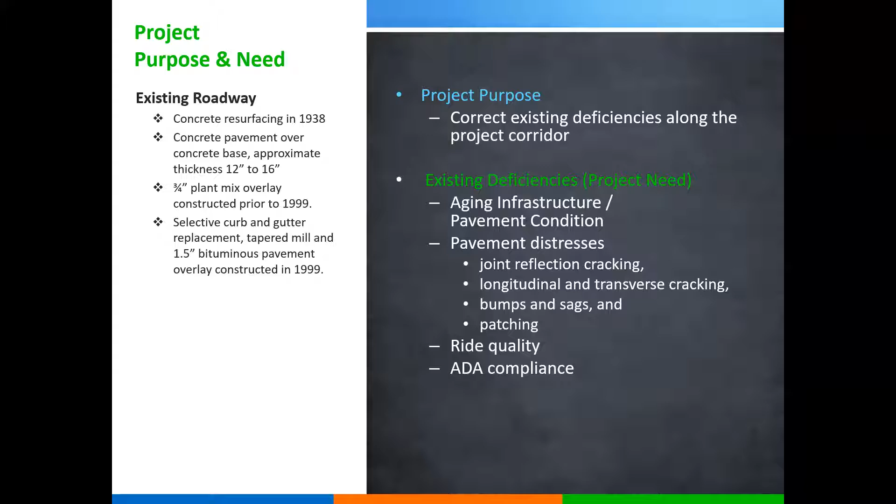But there was also some selective curb and gutter replacement, and a mill and overlay constructed in 1999. So overall, the original roadway is over 80 years old, and it's kind of time for it to be replaced. But there's also some opportunities here to provide some improved ADA compliance out there. And so we will have some improvements in the project to address that as well.

The project will be facilitated by the City of Grand Forks, but it'll be administered through the North Dakota Department of Transportation local government. It'll be funded under the Urban Grant Program, and that's federal funding. And it has a cap, though, on the federal funding of 1.6 million.

So how the project will be paid for: of the construction costs, about 80.93% of those costs will be federally funded, with the remaining 19.07 being city funded. However, once that $1.6 million cap is reached, anything over that cap will be 100% city funds. And it is currently scheduled for construction next year during the 2022 construction season.

You said it was 1.6 is where that 80.93 cuts off? Yes, so that split will apply up to that cap. Okay. And then anything over 1.6 will be 100% city. And that funding is only on eligible items. There are some items that NDDOT or these federal fundings do not cover. So there is some limitation on that, but more or less everything will fall underneath an eligible item. So. That's correct.

So as part of this project, there will be a number of different things under consideration. The obvious improvement is the reconstruction of the roadway itself. ADA improvements, again, some of those are obvious because people will see new curb ramps, new detectable warning panels out there, but some of the things that people may not realize are ADA improvements are things like making sure that the sidewalk slopes out there are conducive to ADA accessibility. So those will be included no matter what alternative is selected, as well as removal of the existing street lighting and new street lighting installation.

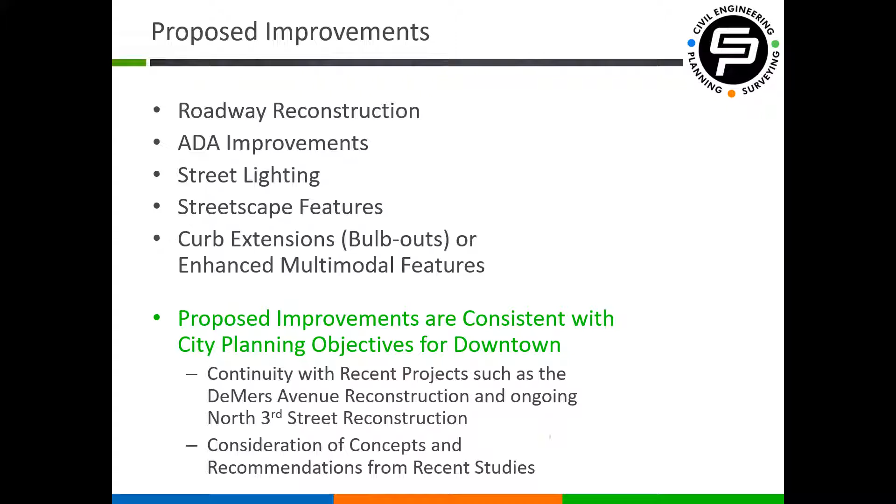And these improvements are consistent with the city's planning objectives for downtown. They'll provide continuity with the recent projects downtown, like DeMers Avenue and the ongoing construction on North 3rd Street. But they'll also take into consideration some concepts and recommendations from recent studies that have been done on the downtown area, and we'll get further into those as well.

So we talked a little bit about streetscape features. What are those? What does streetscaping mean? That'll mean things like decorative sidewalks, some pavers out there, some seat planters, new trees, potential bases for decorative lighting downtown here, and things like bike racks, benches, trash cans that aren't just your standard can. And again, those will be similar to features recently installed on DeMers and on North 3rd.

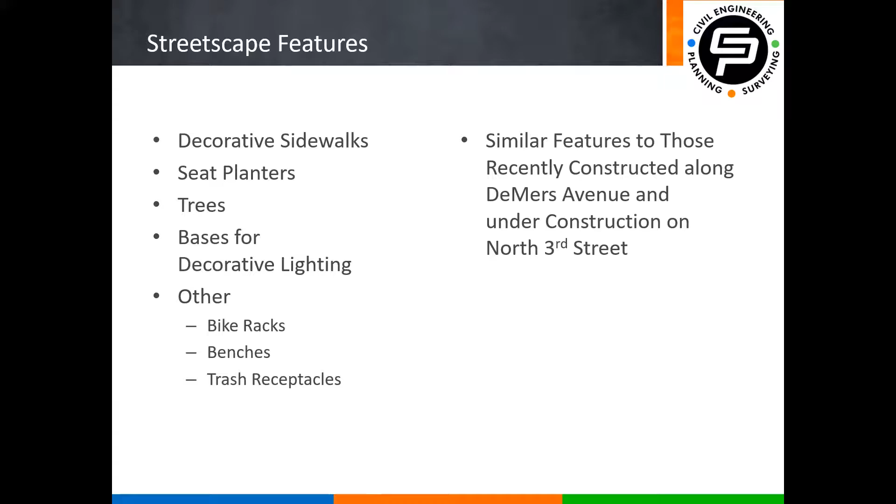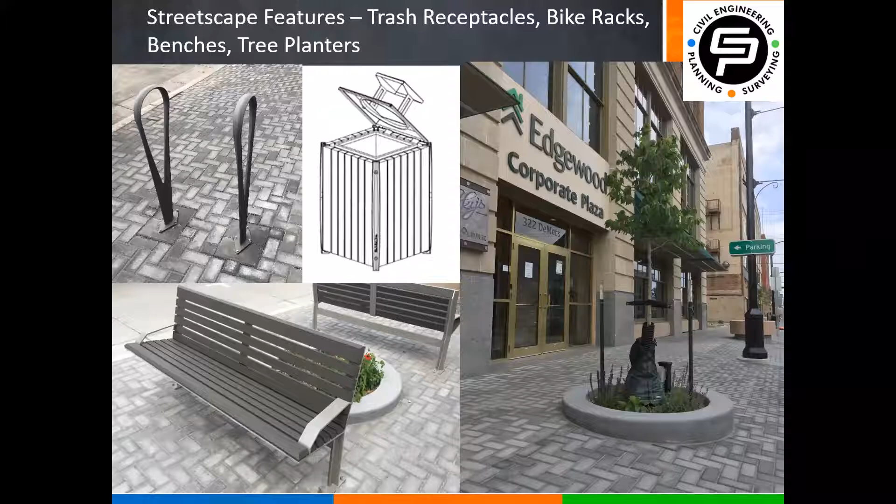So what these might look like if you haven't seen them already, this is an example of a seat planter that will eventually have some flowers in it. So you can see those decorative sidewalk features, a nice finished look to it. The benches in the lower left corner with some plantings, decorative bike racks, the new trees and the floral accents to those. So it really will make for a nice looking continuity with the recent improvements to the downtown area. The trash can that you see will be a little different from what was recently installed on DeMers Avenue, but will have a color scheme that will go along with the surrounding area.

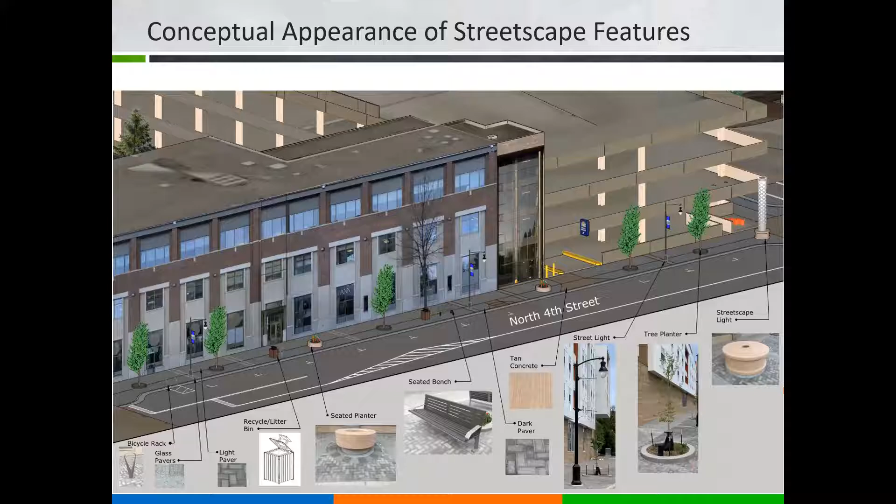So what might those look like and where might they be? Again, there's just some pictorial representation of the decorative features, and they would be located between the curb line and the buildings. And so again, very similar to the recent construction on DeMers Avenue, but this is just a concept of where and how they might be laid out and what they might look like along that corridor.

So with any construction projects, you're going to have some temporary impacts that occur, as we well know, downtown here. And what we anticipate those will include for this project will be temporary impacts to vehicles. We're going to have some detours out there. Pedestrians, same thing. We may have to walk around the construction for a little ways. And also bicycle routes. Right now, there aren't separated bicycle facilities in that area, so the bicycles would be detoured with the vehicular traffic as well.

There will be replacement of the existing trees. One thing that I think is going to be important to clarify is any tree replacement would be in the city right-of-way. So we don't anticipate removal of any private vegetation or trees.

We want to also make sure we do know that we have some historically registered properties along that corridor. So we want to protect those resources, and there's actually a study underway to tell us what and where those are to anticipate. And the project requirements for construction will also include what's called a discovery plan that will tell the contractor what to do if they find something as they're digging out there. So there will be requirements to protect those resources.

We also anticipate that any accesses to businesses along the corridor would remain open throughout the entire duration of the project. There won't ever be a time where you literally cannot get to your front door. So we do anticipate incorporating that requirement into the project.

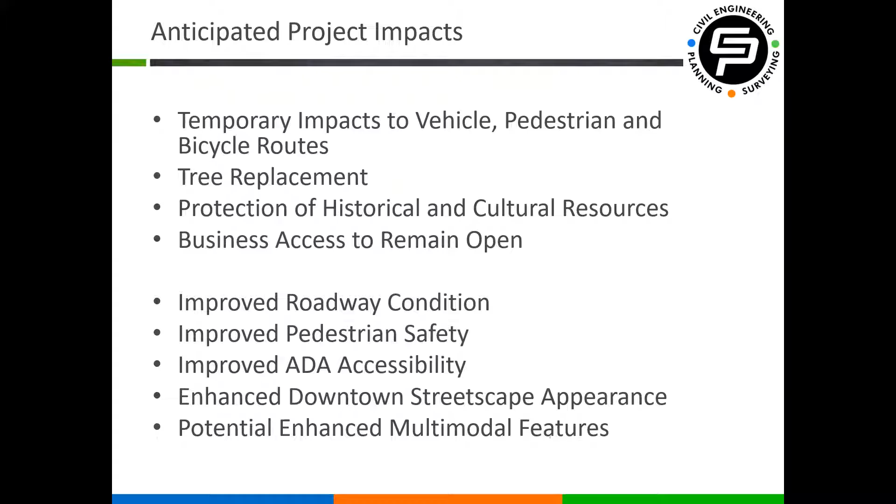So Jen, to your question as well, property and pedestrian access during construction. So at any given time, a sidewalk will have to be reconstructed along here. So what we've done, and this may change during the development of the project, but we have identified a way to phase the pedestrian access. And so you would always have access to your front door, except when they do the work directly on the sidewalk in front of it.

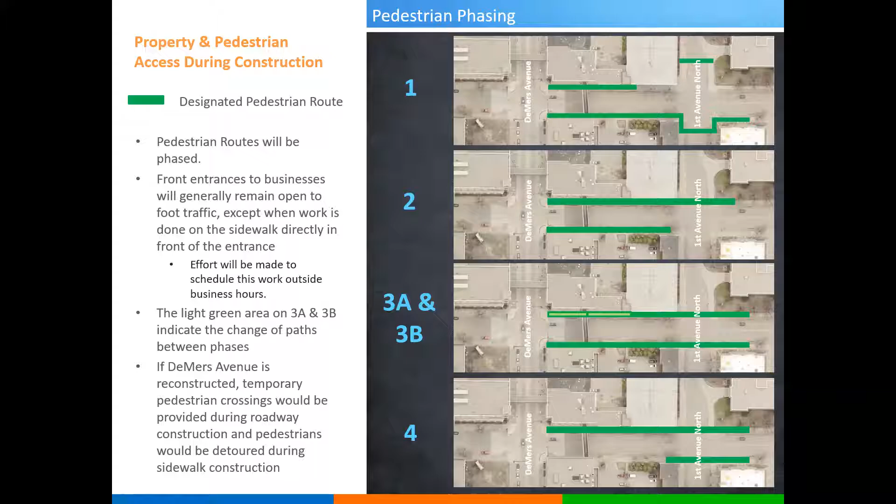Okay, we will talk in a little bit here about a potential construction option that would include some construction in the DeMers Avenue intersection. And basically we would provide temporary pedestrian crossings around that. So you wouldn't have to go much farther than the edge of the intersection to cross there for pedestrians. Vehicular traffic would be detoured a block over, but pedestrians would be able to go around the intersection construction if that alternative was chosen.

So what alternatives are we looking at? We have two that are currently remaining under consideration. We started with quite more than that, and they included various configurations of driving and parking lane widths, having bike lanes or sharrows, which are the shared vehicular and bicycle lanes similar to what you see on University Avenue in town here. We looked at some bus lane and bus stop options, as well as different widths of the sidewalk and boulevards. And when we talk about the boulevard, we would be referring to the area between the curb line and the sidewalk. So basically what I'll call the non-walking area of the sidewalk.

And we have one layout that we are considering the base layout. The reason that we're considering that the base layout is that it was the configuration that was used to secure the urban grant program funding, and it was the configuration used in that application. So because that configuration exists in all the previous documents, we are considering that to be the basis layout. It also is most similar to what exists today. We'd have parallel parking on both sides of the road, and it would also be pretty similar in look to improvements on DeMers and 3rd.

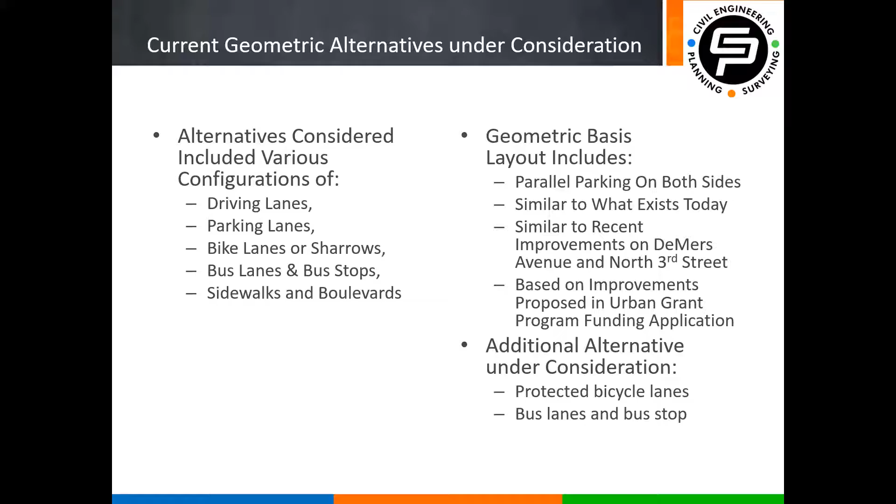And we also have an additional alternative that looks quite different, that would not have the curb bump outs that you've recently seen, but would have bus lanes and protected bicycle lanes. So what would those look like? The preliminary geometric layout of the basis alternative basically would connect to the new bump outs at DeMers Avenue. It would have similar bump outs constructed at First Avenue North.

Oh. And it would have 16-foot wide driving lanes in general, so wide enough for vehicular and bicycle traffic. And there would be a left turn lane from 4th to Demers. First Avenue North would be straight through on both sides, and the side streets, with the exception of the addition of the bump outs, would retain their current configurations.

We would maintain parallel parking on both sides of the road, and there would be an 8-foot sidewalk, and that's a little wider sidewalk than either DeMers Avenue or 3rd Street have in the new construction. The reason that we would like to see that a little wider is because of the existence of Central on the next block, so we'd like to see a little bit wider pedestrian path in there to accommodate the additional pedestrian traffic. And then there would be another 6.5 feet between the sidewalk and the road. And you can see here would be those streetscape features, the street lighting, benches, trash cans, things like that.

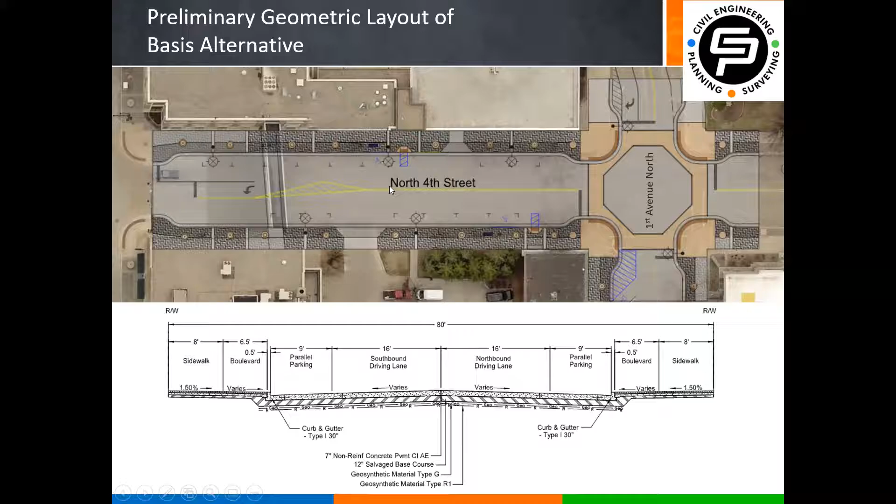And so if a person was standing on the street, this is what we anticipate that they would see. So with Central High School being in the lower right corner off the screen, this would be looking toward DeMers Avenue down 4th. I didn't realize that it was this intersection. I thought it was just down to that corner. That's like so much more exciting. It is very exciting. And you see some of those streetscape features off to the side. So we do think that this would produce a nice looking functional corridor for the downtown area.

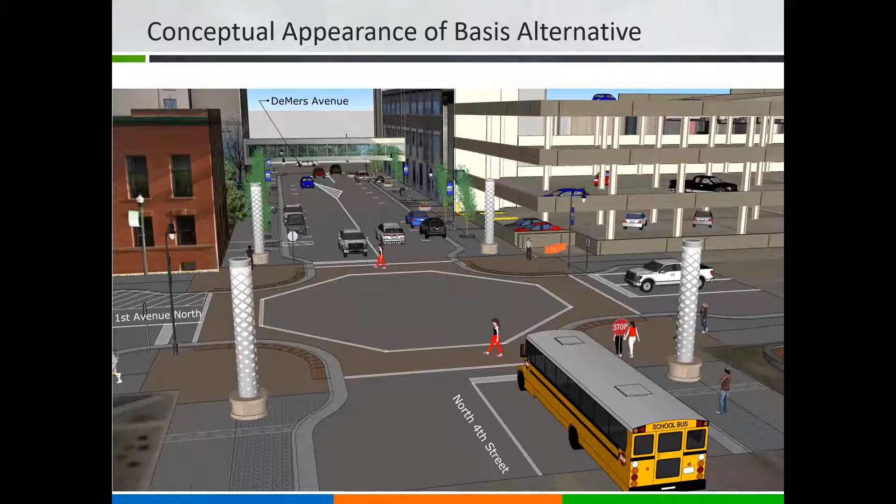On First Avenue, no decorative sidewalk feature down towards west? Correct. The intersection improvements would end basically where we would need to go to tie in elevation-wise for any changes that were made in the intersection itself to accommodate the bump outs. But the sidewalk would still go back, it just wouldn't be there? I mean, the street would still go. Yes. We would still connect everything up, but the decorative features would stop at the end. Cool. Thanks for letting me ask tons of questions. Absolutely, that's what we're here for.

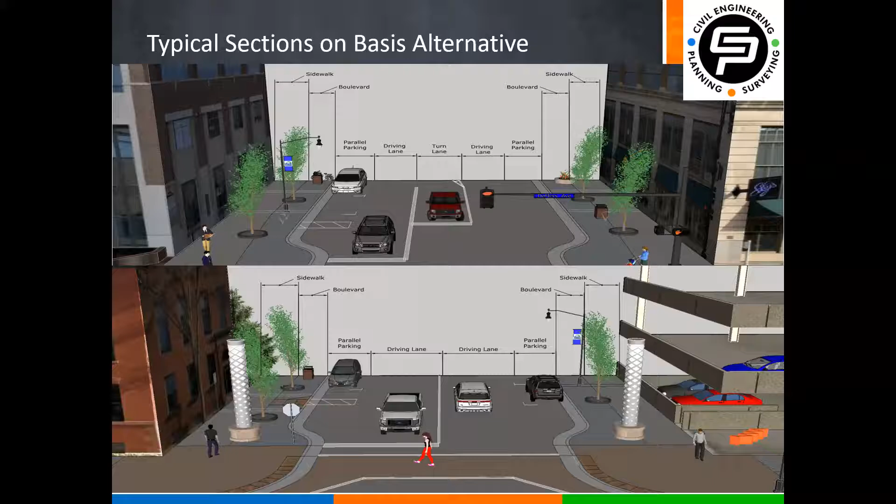So the other thing too is, up next to DeMers Avenue with the left turn lane, how would that all fit in there? And you can kind of see how the streetscape features, like we talked about, would be located in between the curbs and the buildings, but there's still enough room on the back sides of those to walk. So when we get into comparing the alternatives later, when we talk about the passable width of the sidewalk, keep in mind this is a good example to show that the sidewalk may be wide, but there's a couple of spots where those decorative features encroach into that area. So when we talk about passable width, we'll be talking about the area that is available to walk.

So the figure that you see here is excerpted from a study that was prepared by KLJ for the Grand Forks, East Grand Forks MPO, and this came out last fall. This alternative basically is an opportunity to incorporate enhanced multimodal features in the downtown area. As you can see here, this would be an image from DeMers Avenue, looking north along North 4th, and would incorporate separated bike lanes. By separated, we mean having a median in between vehicular traffic and the traveled bike lane. And as you can see here as well, it would carry those features out into the DeMers Avenue intersection as well.

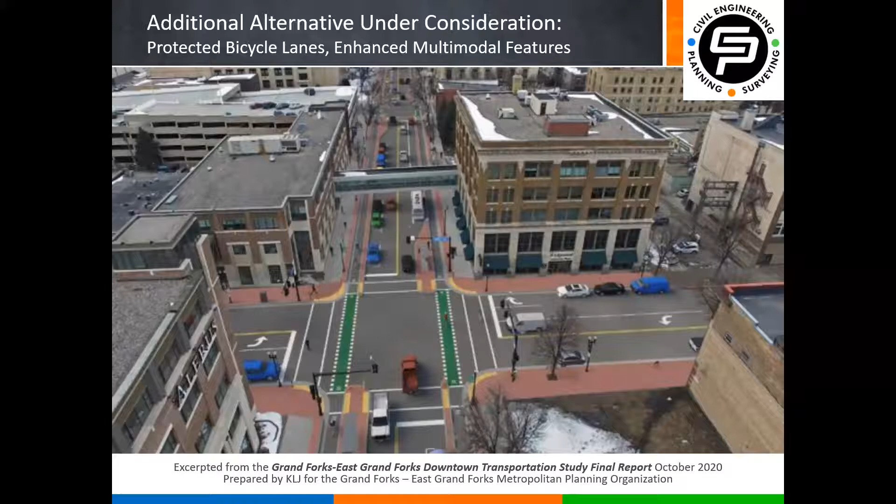So the ends of the project, the termini, would become longer than the other alternative because, for example, at DeMers Avenue, we can't take that bike lane to DeMers Avenue and just have it dead end. We would have to have a place for it to go. And you would see here as well that there are no bump outs on the through direction of North 4th. So the pedestrian crossings would be significantly different than the basis alternative. And that is the reason why this alternative would have to include the reconstruction of the DeMers Avenue intersection.

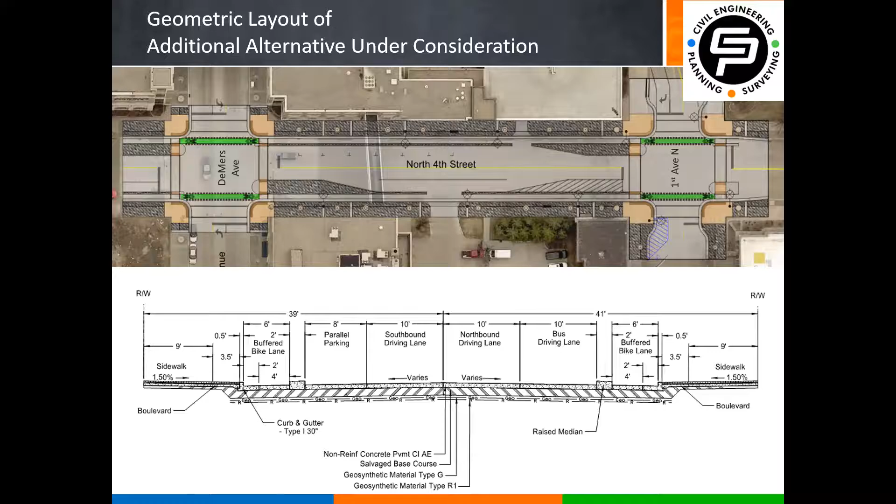So in comparing these, when we did our parking stall count, we went from DeMers Avenue to the driveway between First and Second Avenues North. And the reason for that is the bump outs actually extend into the block between First and Second. So keep in mind, if somebody goes out and counts parking spots between Demers and First, that's not how many there are. That's the length that we considered in this analysis here. So today there are 21 parking stalls out there. And if the option with the bulb outs were constructed, there would be 17. Basically the big reason for those parking stalls disappearing is that the bump outs take more curb area to do.

If the protected bicycle lanes and the enhanced multimodal features were constructed, there would be 7 stalls remaining along that stretch. The total width behind the curb, so the distance between the curb and the building, with the bulb outs would be 14.5 feet. With the other features, we'd have to go a little wider. We'd lose about 2 feet there. And that passable width, again, where you can walk because of the location of the streetscape features, on the bulb out option would be 7 feet. And on the enhanced multimodal and bike lane option would be 5 feet wide.

And driving lanes on the bulb out option would be 16 feet wide. And it's notable too that that 16 feet is wide enough to accommodate the bicycle traffic, just not separated. And under the bicycle lanes being separated, the driving lane for the vehicles would remain at 10 feet. And so again, just to point out, when we talk about that passable width, we're talking about the area of the sidewalk that you can actually get to with your feet.

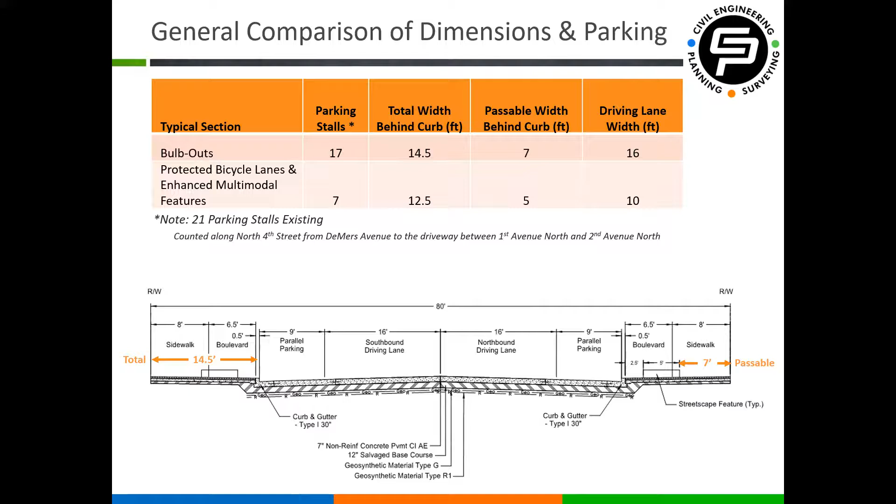And so in comparing these two options, again, the base alternative being the one that was in the urban grant program application, if we were to construct the bicycle lanes and enhanced multimodal features alternative, we would gain those protected bicycle lanes. We would gain a separate bus lane for that type of travel. And there would also be that potential new bus stop and shelter at DeMers Avenue there.

So the cons associated with that would be the fewer parking spaces. We estimate that that option would cost about $1 million more than the base alternative to build. And that sounds like a really high number, but the primary reasons for that are the additional length, the reconstruction of the DeMers Avenue intersection, and also the additional cost to relocate the utilities. So when we move those curbs out, the utilities would have to be moved accordingly. And also the construction of the raised medians between the traffic area and the bicycle lanes.

We would not have the bulb outs for pedestrian safety. The bus stop location being up by DeMers Avenue could potentially impede traffic movements there. So if you're, for example, coming from the bridge and you want to turn right onto 4th Street, if the bus is parked at that bus stop, you wouldn't be able to turn there.

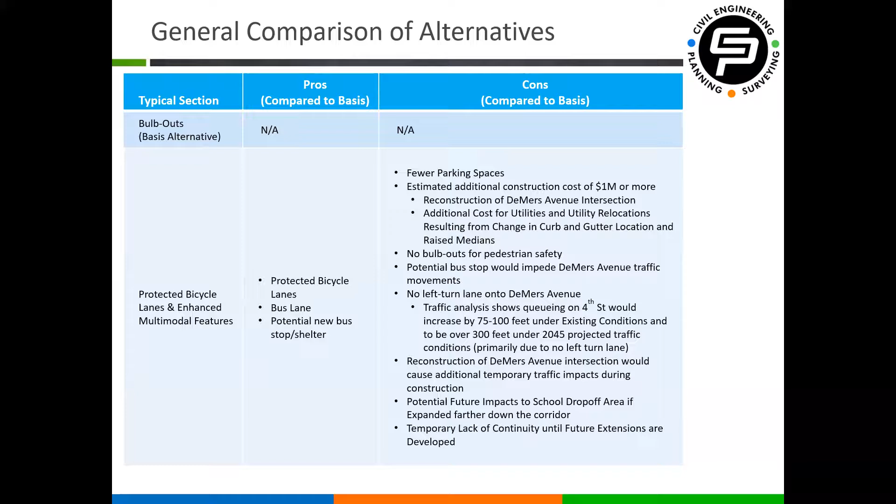There would also be some temporary or potential future impacts there. If you picture where Central is, if those bike lanes separated and those medians were extended down, there would be impacts to the existing drop-off area and the configuration there. And the last major difference that we have identified here is the temporary lack of continuity with that layout until the future extensions were developed. So basically, this configuration would exist for one block, and then it would go back to what exists today, either way.

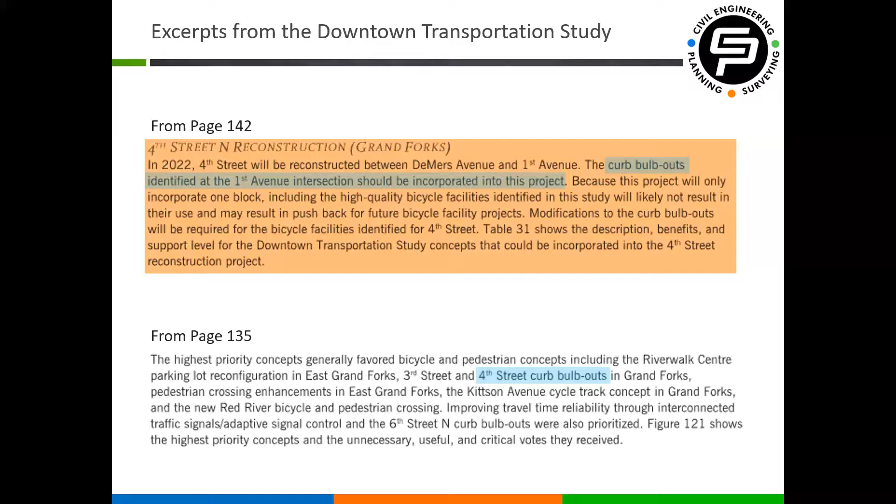These paragraphs here are excerpted from the downtown transportation study in which the enhanced multimodal feature option appeared. And in that study, they actually recommend that the bulb outs be constructed as part of this project. Not necessarily because it's better overall, but because, as we mentioned, this project only incorporates one block. And so it may not result in these features getting used and may produce pushback for future bicycle facility projects. So there is consideration of potentially impeding those future projects there. And so they did prioritize as well in that study construction of the bulb outs. But again, we do want to make sure that that alternative is fully considered.

So at this time, I know we've had some good input along the way, but we want to make sure that if you guys have specific questions about the project, that we get that. And so I would open it up to the visitors that we have here, if there's anything that we either haven't covered or that you'd like to go back to at this time. Not for me, thank you.

I have thoughts. I can email them and type them up. It's some thoughts on the pros and cons list. I feel like there's a lot of things that are missing from the pros list. Okay. I also feel like there's some things that are maybe even missing from the cons list. I think some of the impacts that it has on the South 4th Street businesses, having yet another closure, is probably the biggest negative that shows up in my mind. These people have had 3 years of closure, and one more for something that is, when you start to look at it in those small scales, really small.

As far as the pros go, one single parking spot for a car takes up at a maximum of 4 people, while a bike lane can transition an entire community. So those are some of my thoughts. I also, the bus stop, and this is me speaking, it's like, I don't want another bus stop, but I don't see the bus stop being advantageous for that block. While I feel like leaving some sort of a parking room, or even leaving some sort of a space for Jen's clients, things like that, I think has a lot stronger impact with the protected bike lane.

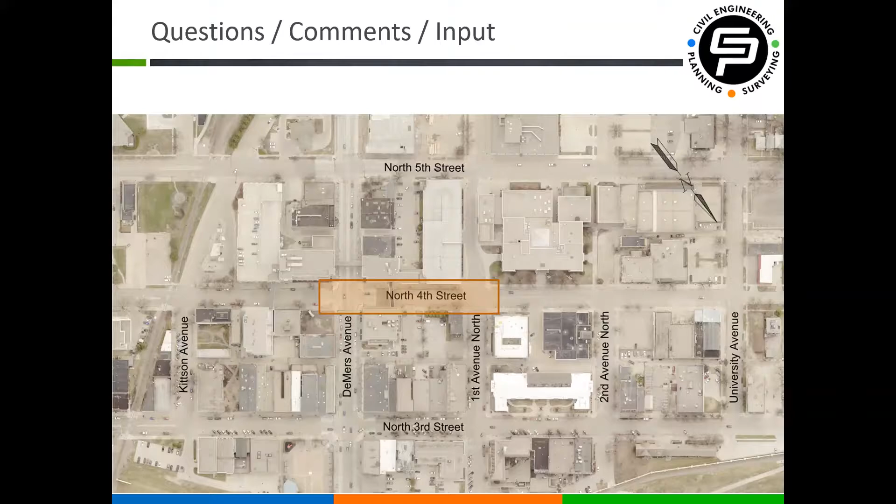And so I don't know how much those two, it feels like we're either going to get one or two, and there's no way to change either of those ones. And so I just need to bring that up and speak my piece in that scenario. Okay. Well, as far as how to do that, then I just had a map inserted here in case we needed to look at the overview again for either way.

We do want to let everybody know that this meeting, the recording, will be available on the city website, and the instructions to access it are here. You go to grandforksgov.com, click on government meeting information, and go to the meeting calendar, and then the information will be on the calendar for today's date.

Okay. The comment period will stay open for 15 days, so it'll be till June 25th. And there's a lot of different ways to submit those. You can either just email me directly. My email address is listed on here. Make sure you put virtual public input meeting in the subject heading, because that helps us sort those out and make sure that we report them all.

And on the sign-in sheet that you get via email, since you attended today or requested the Zoom link, it will include a comment option before you click submit. So you'll be able to do that. And then again, you'll be provided a form via email that you can mail physically. And the address to send that will be on the form.

So if anybody here doesn't have additional input, we are going to leave the Zoom meeting open for a while, just in case anybody else logs on. We will be here till 6:30, so feel free to send us anything up to and until then, and we'll be here to answer questions in that window. And always too, even after the comment period closes, feel free to get a hold of us. This is just the date to get it included in the official project record and submittal, so it will be published along with the project documents.